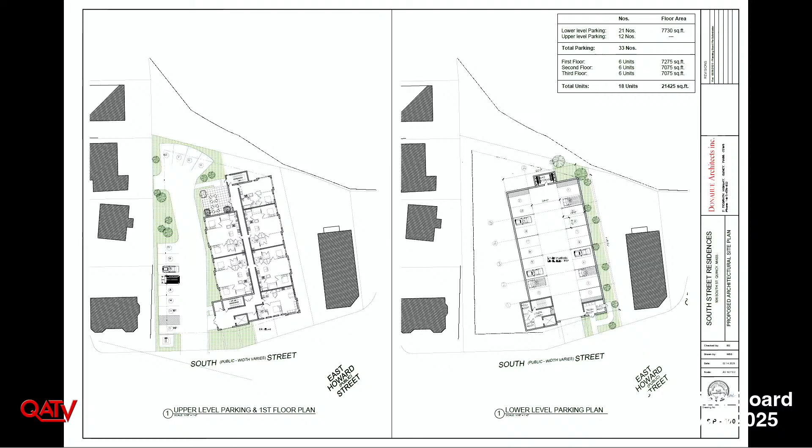So what that does is it also opens up the building to a little bit more outdoor space for the residents, and it creates more outdoor space for the enjoyment of the people that live there. Also, on the left side along the property line, you can see that we've removed the parallel spaces and greened that up tremendously. We've also moved the transformer from the front of the building by the drive over to the island by that left side parking. So the green space, I'll bring up the landscape plan in a second, but that shows that we've also gone from 35 spaces to 33, but we think that that's reasonable in light of the fact that we've reduced the number of units. There are still 21 spaces in the parking garage below.

I'd also like to address your concern, Madam Chair, about the size of, this may be an incidental issue, but you had commented about the trash room being small. So we doubled the size of that for the bins, and that's gone from 60 square feet to 110 square feet. So we did that without losing space. It was really an easy manipulation.

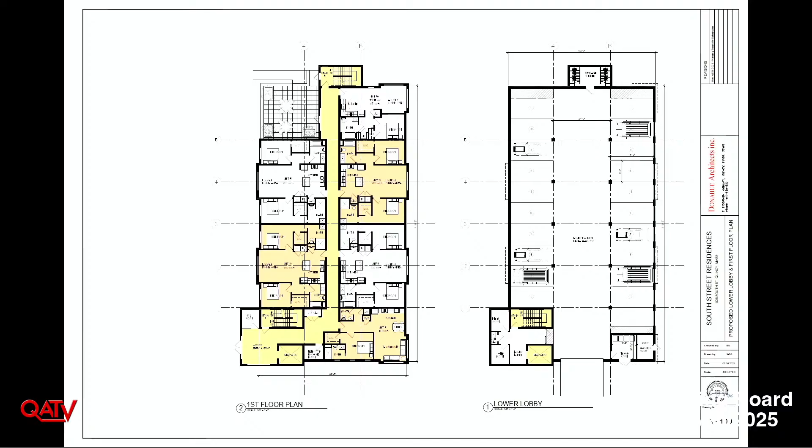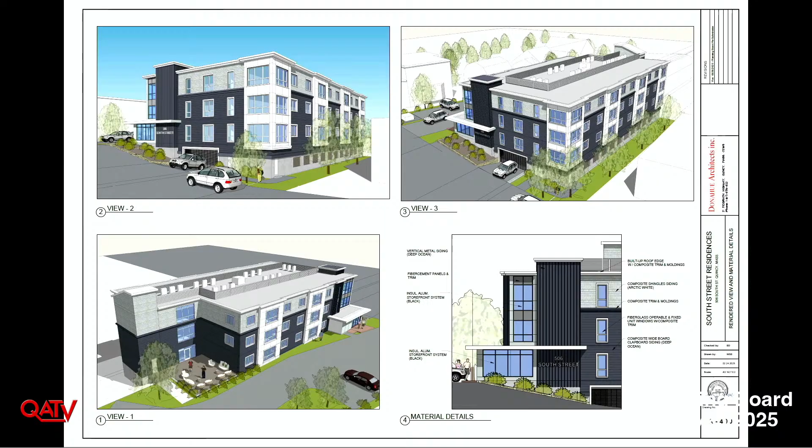I think that's it in terms of the architectural changes. Just want to highlight this briefly. Madam Chair, you had raised a concern about this, and it was hard to understand how much space that was. That's actually 3 feet in width, so it's not right up against the property line, and there will be a fence installed as well. We can certainly discuss the fencing with the neighbor, whether the fence should be brought in onto our site or onto the neighbor's property to provide them with additional green space along their lot.

And we talked about concerns raised about the transformer that was kind of buried in this location in the front of the building. After talking with National Grid, they changed their mind, that wasn't a good space for it. So we relocated it to the corner of the parking lot, and we directed our landscape architect to really green up around that transformer so that it will be shaded by the greenery and not be sticking out as an eyesore.

That opens up the front of the building now to really be a lot more attractive, as it was before. And this exterior patio space, I think, is really responsive to Mr. Foley's concerns about having some exterior space that these folks can enjoy. As you can see, this is a significant amount of lawn in the back that's going to provide for trash receptacles, so that folks can walk out into this area and utilize this lawn space for their dogs, for their pets.

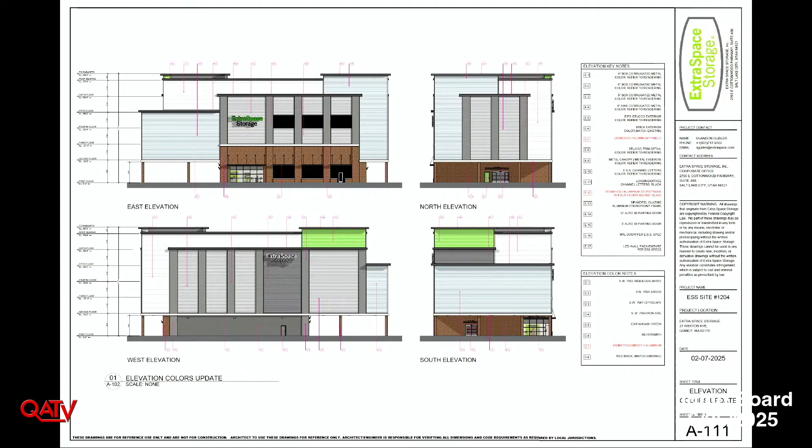So these elevations provide the board with a better visual image of some of the changes that have been made to the plans, adding some of the green amenities from the Extra Space coloring, and also these windows that were added. This entire facade here was essentially all just blank space, and by adding those windows, it gives it a little bit more residential feel in consideration of the neighborhood. Again, some of the additional window space and green was added to the building.

So that's really the only change that we made. I think overall the response was very good that we received from the board and from the community. Mr. Dryden worked very hard to respond to all of the peer review comments, all of the city's department comments, had meetings with Chen Sang also about some questions that Michael had about some of the foundationary items, and was able to reach agreement with Chen on those.

So that's essentially our presentation for tonight on any revisions. If there's any questions, we're certainly here to respond. Does anyone have any questions?

Madam Chair, just asking, so the developers of this project, are they a national chain, a local chain? David, do you self-perform?

So Extra Space Storage is the owner of the property. SDG Development, which I'm a principal of, is the development manager and general contractor. So we'll be building the facility for Extra Space. We're based out of Massachusetts.

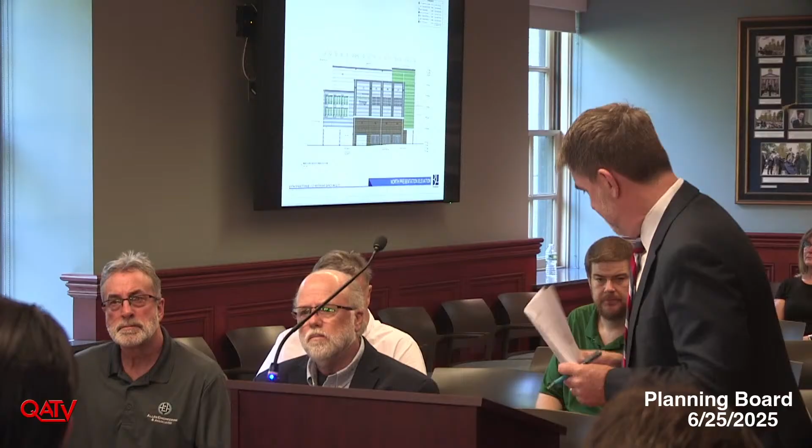All right, so is everybody... yes. Is there any drawing that would show a landscape plan and all that? Like she said, the woman mentioned it's a tree desert over there, so is there any?

We submitted landscape plans with a site plan. There's plantings proposed along the Weston Avenue frontage, as well as tree plantings between the proposed site and the daycare facility to the south.

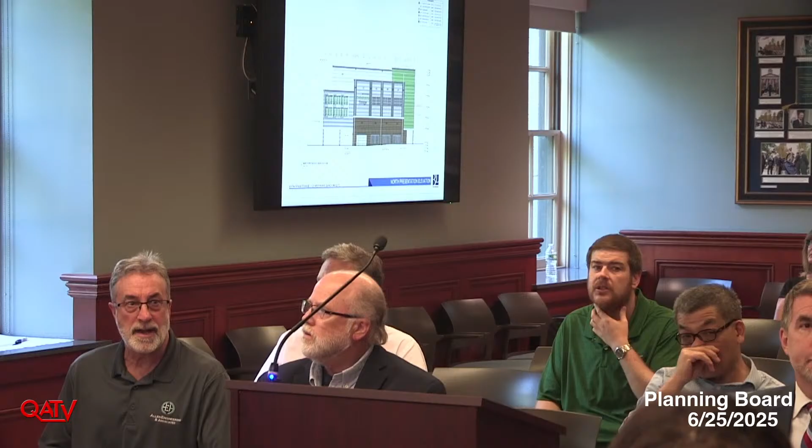Thank you. Great, any other questions? Good, okay. So is there a motion to close? So moved. Okay, is there a second? Second. All right, so that was member Liuzzo and Kelly. All those in favor? Aye. And does the department have a recommendation? Yes. Okay.

Through you, Madam Chair, to the board, after consideration of the site plan, accompanying documents, and the comments received from city staff and the peer review consultant, the department recommends the board approve special permit Title 17, Sections 3.1.3, major non-residential use, and 5.1.17, parking waivers, subject to the below listed special and general conditions.

Number 1, the applicant shall obtain all applicable findings, variances, and special permits if needed from the City of Quincy Zoning Board of Appeal. Number 2, the applicant shall submit a construction management plan to be filed and approved prior to the issuance of a building permit.

This shall include the locations of stockpile and/or staging areas for construction equipment and materials. The applicant shall also address construction period traffic impacts by providing a detailed sequence of construction and addressing any space constraints, detailing how they'll be addressed as construction progresses.

3, the applicant shall reconstruct the sidewalk along the entire property frontage of Weston Ave with cement concrete broom finished with border and tool joints, and reset or replace granite curbing as specified by the Department of Public Works.

4, Weston Avenue was repaved in 2024. The applicant must obtain approval from the Commissioner of Public Works to perform work in Weston Ave before 2029. The applicant shall be responsible for restoring the roadway curbing and sidewalk to finished condition once construction activities have concluded.

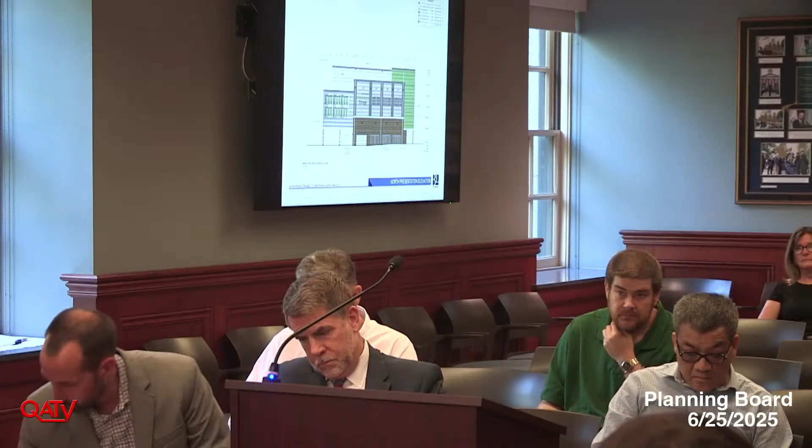Okay, and we did receive additional comment from Ross Nanopoulos. It's on several matters. I'll read the introduction and then read into the record his comments on these specific projects.

To the planning board: I moved to Wollaston six years ago with the promise of the Wollaston Urban Redevelopment Plan, and while I have seen businesses come and go, empty lots and storefronts still sit unused and undeveloped. The area around the Wollaston T-stop is where development must happen. I encourage residents to abandon the scarcity mindset that has engulfed past meetings and embrace one of abundance. It is inevitable that cities will grow, otherwise they stagnate. Instead of aiming for less or shorter buildings, Wollaston should reap the benefits through affordable housing and additional growth that benefits local businesses. Additionally, the planning board must work with the Affordable Housing Trust Committee to align incentives for developers to actually build affordable housing instead of simply paying a fee, as was mentioned as the preferred outcome of the Affordable Housing Trust Committee in past meetings.

Regarding my comments on specific properties: as to 18, 24, and 28 Old Colony Avenue, I am disappointed at the reduction of units from 94 to 62, a loss of 32 units, and the removal of affordable housing. Affordable housing should not be sacrificed to make a building slightly smaller. This area already has taller buildings, and we must embrace development near the Wollaston T-stop.

And as to 38 Old Colony Ave, I am disappointed at the reduction of units from 27 to 19, a loss of 8 units, and the removal of affordable housing. Affordable housing should not be sacrificed to make a building slightly smaller. This area has taller buildings and we must embrace development near the Wollaston T-stop.

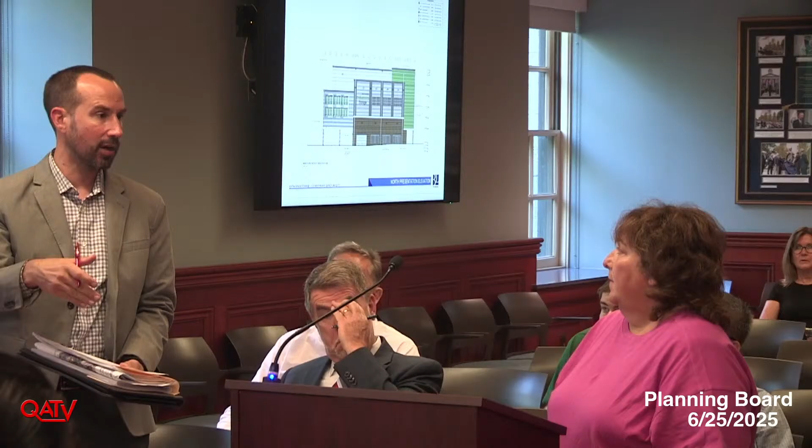Is that an option? I can maybe add to that. So the intersection at Beale Street and Old Colony used to be signalized for traffic, and now it has priority pedestrian crossings. So there's that signalized crossing for the pedestrians. The city already took steps to heighten that crossing, knowing that they want to drive traffic. So the city actually created more of a traffic jam, and putting up more buildings with more vehicles is gonna cause a bigger traffic jam.

I'm asking, can we put a fence up and force the pedestrians to go left or right where the lights are already existing, where when people are coming off of Old Colony Ave, they have the option to take a left or right. Because once the pedestrian lights, the blinking lights, once they're pushed, it's complete gridlock. Obviously the pedestrian has the right of way, but it's gridlock coming off of Old Colony Ave. It is gridlock going down Beale Street, it is gridlock coming up Beale Street.

Hancock Street is gridlocked, Newport Ave is gridlocked. People on the other side of Beale Street where the Wollaston train station is, you get like 4 cars through. So there has to be some kind of barrier to stop the pedestrians from crossing wherever they want, like a fence, so they just can't walk across to the train station. We're all talking about foot traffic, because that's what people want, I get it, but can we make the foot traffic go in a certain pattern, like we do cars?

Is that doable? Can you put a fence up? I know it's a train station, but... We can't. And I doubt that the city can do it, but that's a city decision that has to be made by the city.

So did the city get money for that blinking light, or is that something that has to be there? If there wasn't a light, the pedestrians, if they were smart, would go to where there are lights and a crosswalk, I would imagine. Could we remove that blinking light for pedestrians and force them to go to where there's actually a stoplight and a walking signal? Is that an option for the city to do?

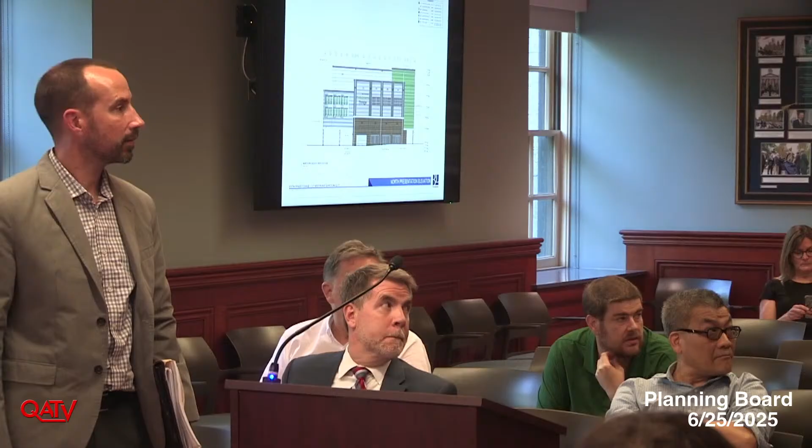And that's the highest rating it can go, so it can't go any higher, so it can't get any worse according to your scale, if I'm correct. Yeah, according to the scale, it can get worse though, the paper just says it can't. Yeah, and I think there was a marginal impact of a few seconds at that intersection. I think over the course of time, people find routes to go, right? There's just a natural pattern that happens.

Thank you. All right, anyone else wishing to speak on these applications? Okay, and so with that, motion to close the public hearing.

Okay, so we need to close each. The first will be 18, 24, and 28 Old Colony Ave. Is there a motion to close that? So moved. Okay, is there a second? Second. Okay, so all those in favor? Aye.

Should I close the next one too before? Okay, so we will then close 38 Old Colony Ave as well. Motion to close 38 Old Colony Ave. Is there a second? All those in favor? Aye.

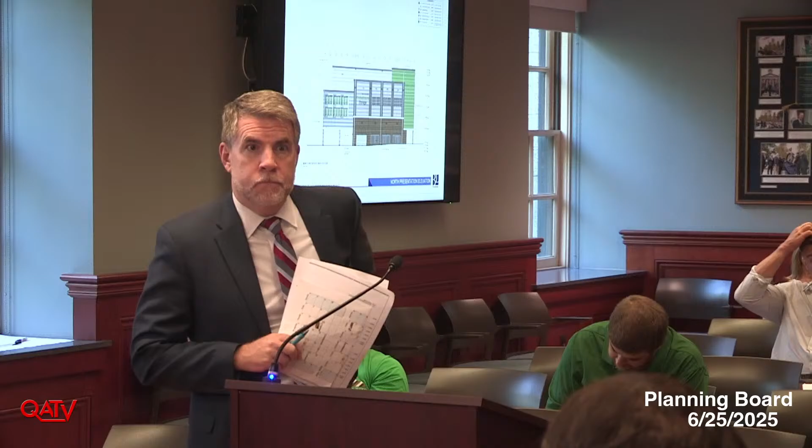Thank you. Does anybody have any questions? I'd like to make a couple comments. I think it's going to be a nice addition to the area. I liked the project built at the old China Star, and I think this is a very similar project that will add to the area. You also get the benefits of what they're doing on C Street. Absolutely, that's a great thing.

Mr. Lee, I would hope that when you decide to build with local contractors, you keep in mind the men and women of the city of Quincy. They live here and they'd like to work on projects in the city, so keep that in mind when choosing a contractor. Thank you. Good luck. I know our friend Jimmy Dunn will be part of the job right off the bat. He's a local guy, as local as they come.

Does anybody else have any comments? Mr. Dunn? Thank you. All right, so it is a public hearing, so if anybody would like to speak on this, it's 211 C Street, Planning Board Case Number 2025-10. There are sign-in sheets along the window.

Okay, all right, seeing none, is there a motion to close the public hearing? Okay, all those in favor? Aye. Aye.

And I would just echo Mr. Kelly's comments. I think this came to us, like so many projects rarely do, very well thought out, taking into consideration a lot of the comments from the neighbors. I think that's a testament to you and the thoughtfulness put into the design, and I think it will be great. Thank you.

Does the department have a recommendation? Yes, we do. Through you, Madam Chair, to the board: after consideration of the site plan, accompanying documents, and comments received from city staff and the peer review consultant, the department recommends the board approve site plan review under zoning ordinance Title 17, Section 9.5.1, and special permit under Section 5.1.17 parking waivers, subject to the below listed special and general conditions. One, the applicant shall obtain all applicable findings, variances, and special permits if needed from the City of Quincy Zoning Board of Appeal. Two, the applicant shall comply with the City of Quincy inclusionary zoning ordinance, Section 7, and shall submit an IZO application to the Affordable Housing Trust Fund Committee prior to the issuance of a building permit.

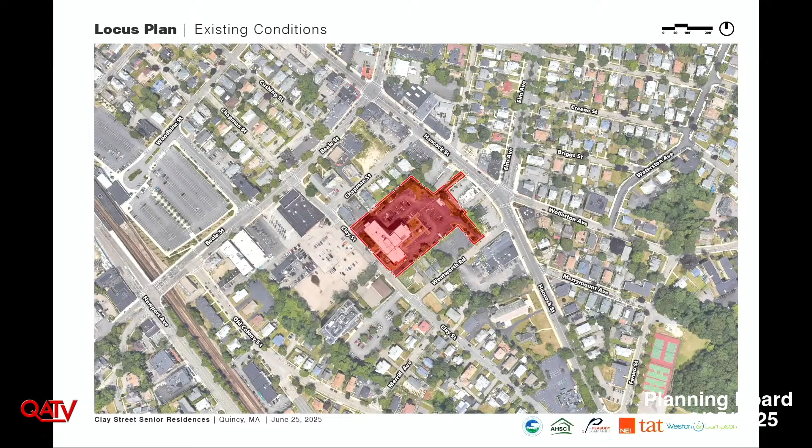We'll start with the first slide. I want to get everybody oriented to the site, whether you're familiar with it or not. This is oriented to the north. You have Clay Street essentially to the south of the existing Tobin Tower, Wentworth on the eastern side of our site, and Hancock Street to the north of that. As mentioned, we're in the Wollaston neighborhood.

Here's a snapshot of what the existing site looks like now. I don't know how many of you were on the board back in 2016, but if anyone was, you're probably familiar with this project that came through for redevelopment. There was no curb cut at the time to Wentworth Road, so the project came through to do a full redevelopment of the back area behind the building, and what you see here today is the final product that was constructed in 2017.

At that time, the site was fully repaved, stormwater was updated to comply with Mass Stormwater Guidelines in full compliance, and utilities were brought in for lighting, making sure the existing building was in compliance. When we got on board, we looked at the record plans of what was constructed in 2017 and understood we needed to find out what happened then and what's going on today, especially with stormwater. We heard right out of the gate that there were concerns in this neighborhood with stormwater, not only affecting our site on Clay Street but the overall area.

So we wanted to find out soon what's going on with the potential for future flooding and be sensitive to that when redesigning. We always look at a site to understand the constraints right out of the gate, from utilities, stormwater, abutters, and buffer zones, before we start laying things out.

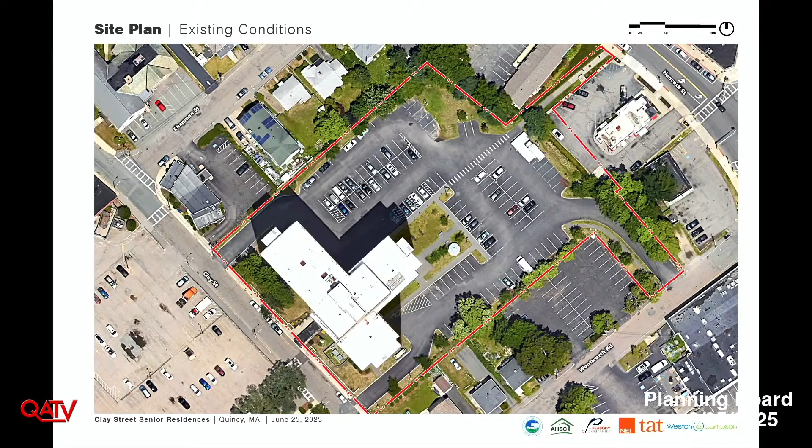So when we heard that, we said, what if we change the circulation on the site? There are 2 curb cuts off of Clay Street now, both full access in and out, and then there's a curb cut off of Wentworth with 2-way access.

What we're going to do is, that one in the lower corner, we'll essentially abandon the cut-through ability of that curb cut and just have it be for 2 parking spaces, for employees of Tobin Tower, removing the ability to drive through the site or out through that Clay Street access. The existing one to the west, we'll change to one-way only, so it's ingress only into the site, not 2-way. That's going to accomplish a lot for the congestion on Clay Street.

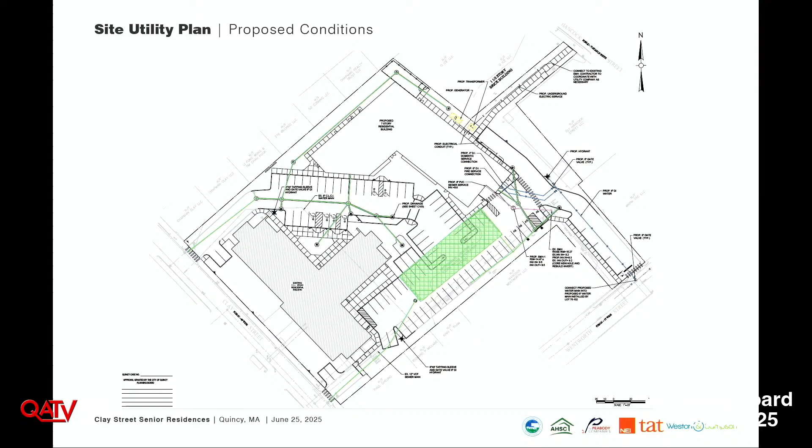Thank you, Jesse. Good evening, everyone. Jonathan Law from Weston & Sampson, I'm part of the design group, and I will talk a little bit about the site amenities that we've developed as part of this proposal.

When we approached this problem, the solution we came up with was how can we connect these two buildings so they feel like they talk to each other and are part of the same site. We've done that by using materiality on both sites that match and talk to each other, emphasizing entrances and exit points from the buildings and connections by using specialty pavers, which may in some instances be permeable - again, thinking about low impact development ways of dealing with stormwater.

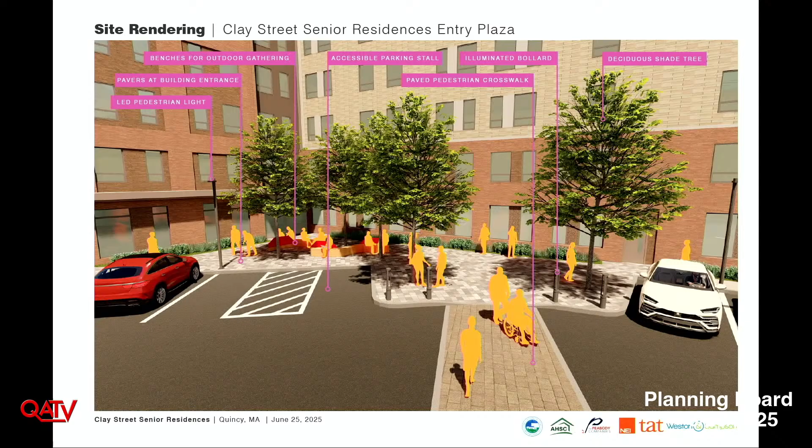This is another view swinging around, looking at the main entrance to the new development, the new building. As I mentioned, we're trying to incorporate as many shade trees as we can and think about how people can gather and sit outside in these spaces.

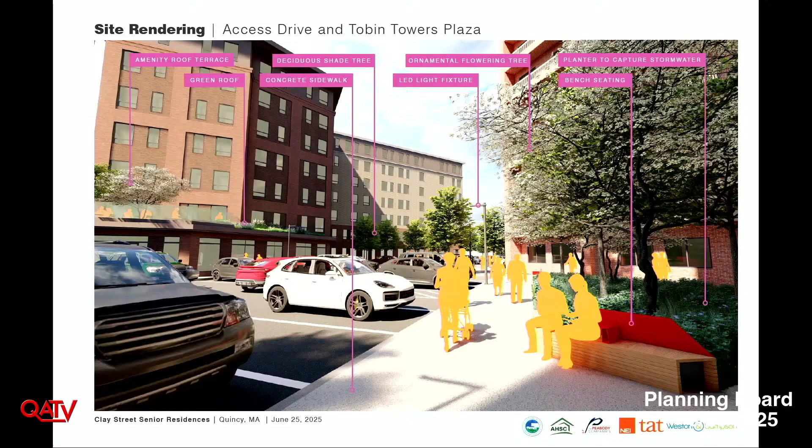Some of the materials, like the paving, we'll think about the solar reflectance index, so when the sun hits it, instead of heat radiating off it, it helps to reduce the effects of heat on the site.

This is a new planted green space that we're including by Tobin Towers, with more seating scattered amongst the development so people can take a respite whenever they like. You can see again the green roof and the amenity roof terrace.

This is the new space in front of Tobin Towers, as I talked about previously. Similar benches and ground plane materials match across both buildings, bringing some continuity to the design and the site in general.

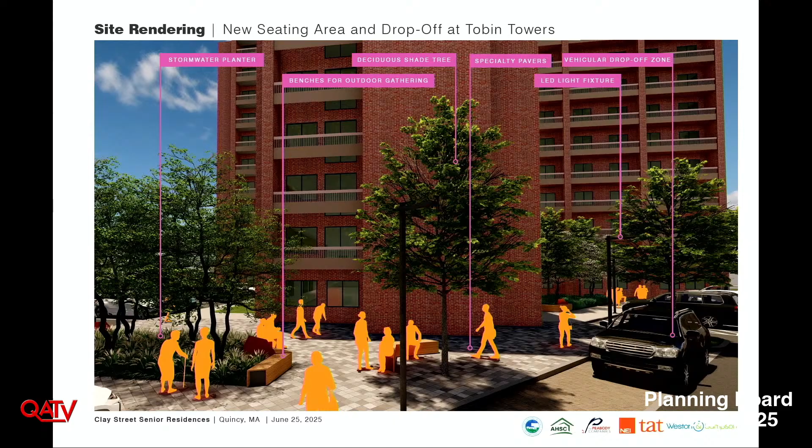I'll talk about the architecture. Thank you.

Thank you, Jonathan. My name is Jay Szymanski, I'm a principal with TAT. We're the architects for the project.

As has been mentioned, we're proposing a 7-story building. It includes 94 one-bedroom units, all affordable, set aside for seniors. The entire building will be visitable by people with mobility impairments, and in addition, 10% of the units will be set aside as fully accessible units. The building will be designed for Passive House certification, along with Energy Star compliance and Enterprise Green Communities. We will build the building to be solar ready, meaning we'll put in the infrastructure to be able to put solar panels on the roof in the future.

What you're looking at here is the ground floor plan. It's essentially an L-shaped building. The top portion in gray is parking, 22 spaces inside the building. We also have back of house spaces: the electric room in the top corner, water service room, maintenance room, trash and recycling. In the lower wing, shown in salmon, are the resident services: a resident lobby, mail and package room, management offices, resident services offices, a community room on the bottom left, a wellness office, and some restrooms.

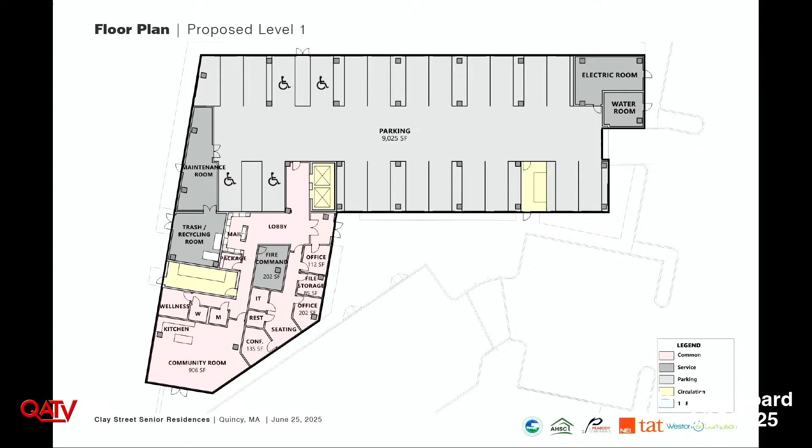This is levels 3 through 7. They're all identical, 16 units on each floor. We also have common laundry on each floor, access to a trash and recycling chute that leads down to the trash room on the ground floor, and of course internal vertical circulation with 2 elevators and 2 stair towers.

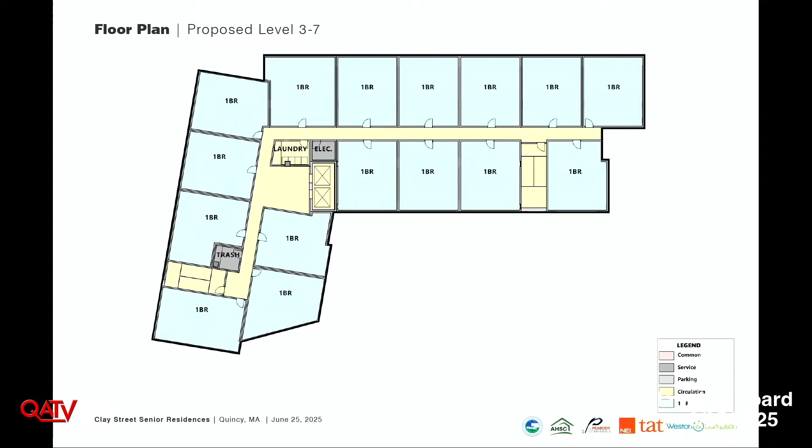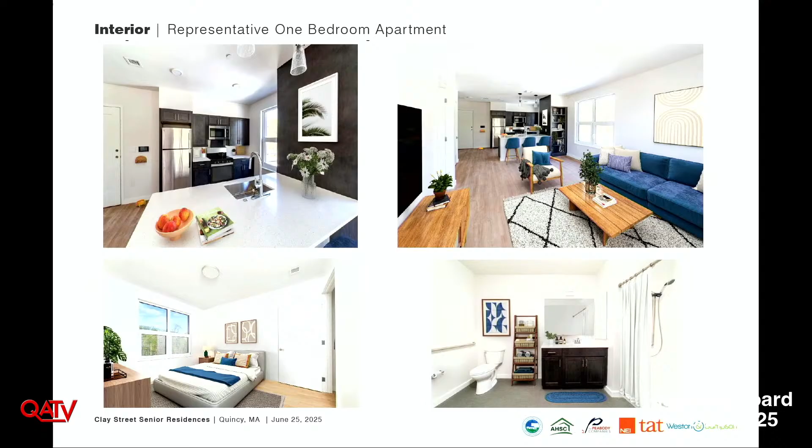So this is just an example of a one-bedroom unit that Peabody Properties has developed in the past. Typically, they're open kitchens, open to the living room and dining areas. They use high-quality, durable materials, solid surface countertops, LVT flooring, LED light fixtures. So again, this just gives you an example of what we propose to build here.

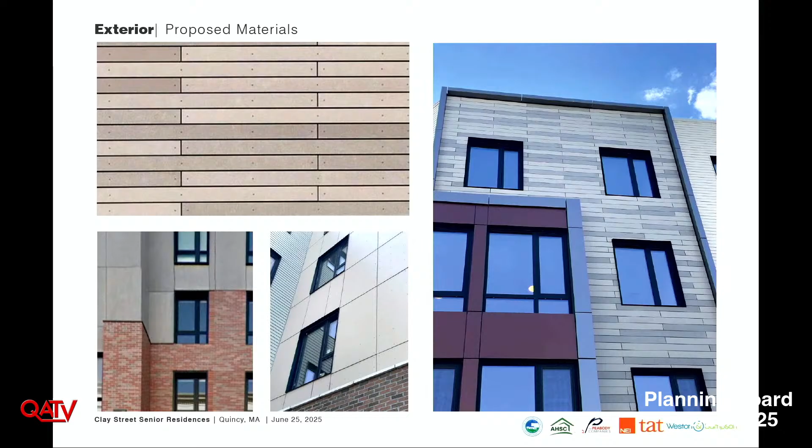And with that, I'll hand it off to Doug to talk a little bit about traffic.

Greetings, I'm Doug Osler, Weston & Sampson, traffic engineer who performed the transportation impact assessment for the project. I did have some coordination with, forgive me if I say it wrong, I believe it was Allison Luff, who's the traffic engineer at the city of Quincy, so she's familiar with what was proposed and provided in the report submitted as part of the application. In brief, we don't expect any major transportation impacts specific to our site because we don't expect to be generating very many trips. We're very far from any threshold requirements that MEPA provides for state traffic studies, but of course we're providing this in order to document what we expect for the location.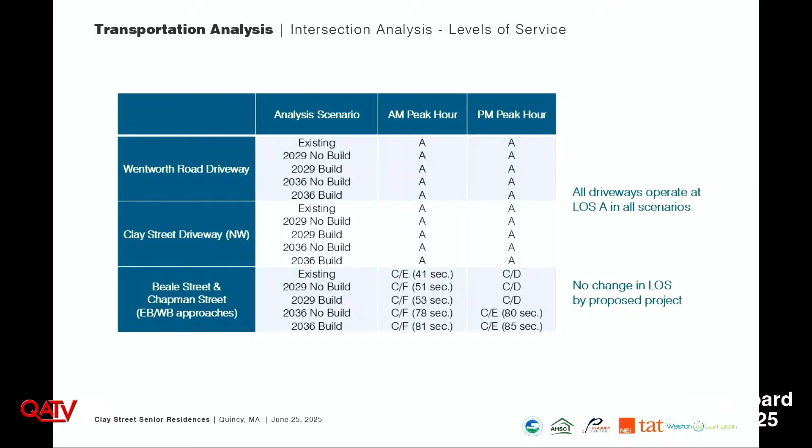There are additional things, but I'm not going to go through all the minuscule details. The report did get to Allison, and she's reviewing that, of course. I'm happy to answer any questions.

So that's the applicant's presentation tonight. I don't think I mentioned, but obviously the relief that's being requested is a site plan review and also a special permit parking waiver, similar to the other proposals you've heard tonight. We know that peer review hasn't had an opportunity to fully review this, as well as the departments, and we'll continue to work with them to respond to all their concerns, and we anticipate that this matter will be continued until August.

Okay, let me see if anybody has questions. Member Shaughnessy: So looking at this rendering, my first thought is it kind of looks like the prison that's over there inside Boston.

I don't see any exterior areas for any of the residents to go outside, other than that little small area on the second floor with a small green space. So if I was in this tower and my brother was in the other tower, he'd be waving at me out on his balcony, and I'd be behind my window going 'how's it going?' So I'm just wondering, why wouldn't you consider putting balconies or something outside, so it would match the other one?

Well, is that what's on the other ones? I was trying to see it, Clay. Yeah, there's - it looks like balconies on the other building. Yeah, there's balconies on some of them. Isn't it? The pictures show on Tobin Towers, it looks like balconies.

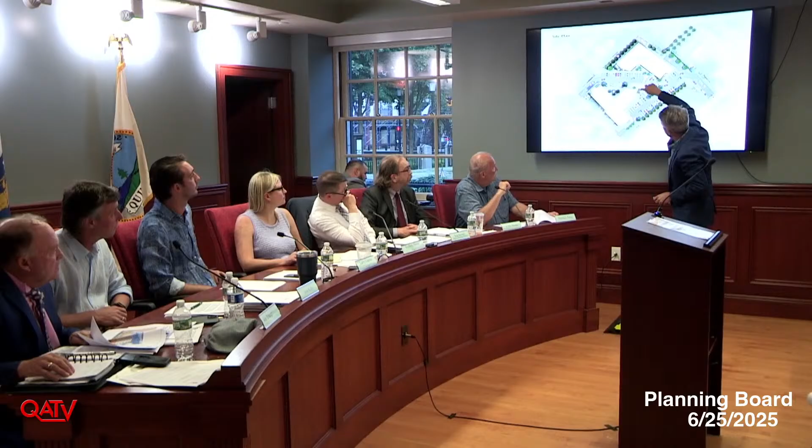Jay: Am I allowed to come up to this? So we're creating, in these spaces here, exterior spaces that don't exist today. We're also creating new seating spaces here, and then also in this space here. For the size of this site, we're restricted by needing emergency vehicle access through the site, so that's why this road comes through here. In an ideal world, this would be a green space, a big lawn area, but we can't do that because we need fire access through the site.

We need to be able to get this building on three sides, so that's why the road comes through.

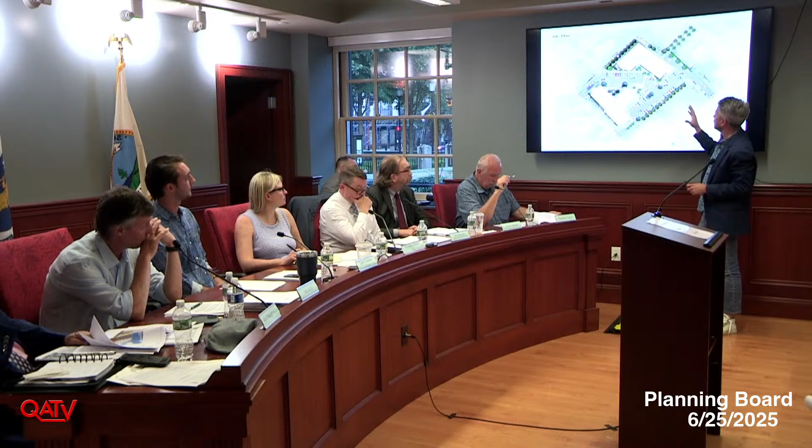With what we're dealing with, the space left over, we've created some meaningful places for people to sit, and again, they're sitting under natural shade. We're talking about potentially putting a shade structure in this space here. So in terms of outdoor gathering spaces, we're restricted with the space we have, but I think we've maximized that within this footprint of the site.

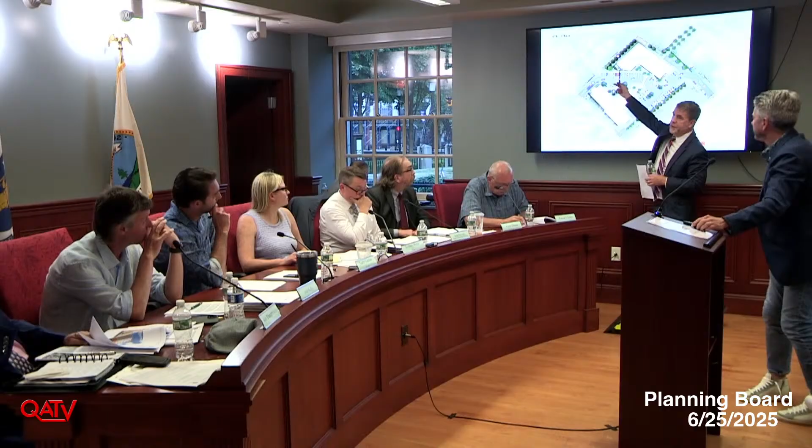There's also the structured patio space up here on the second level that will be utilized, and also community room space within the building. So if family does come over and they want to get together, they can utilize space within the inside of the building as well, but also this structured space and the space on the ground.

I'll just add that all sidewalks and paved areas are ADA accessible. So what I mean by that is everything is graded at less than 5%. There's no ramps, there's no handrails, there's no stairs to get into the new building, so it's fully accessible for everybody.

Right now, as everybody knows, it's just a parking lot back there with really no sidewalk connections. As I mentioned earlier, we've improved the connections not only within the site, but to the exterior, Hancock, Wentworth, and Clay, so there's plenty of space for people to walk and loop in this site without leaving.

Please don't take my comments as being offensive. I know you haven't, but I love the idea that you're gonna get some affordable housing here. I mean, that's awesome, I think it's just great. It's just that I think, okay, that's nice, and elderly, I happen to be one of those at this point. If we're going at 60 and above? Sixty-two. Yeah, so if I get stuck over there, I'd like a little bit of green space, but I like the fact that you're coming in with affordable housing. I applaud your efforts, I think it's wonderful.

I'd just like to see, maybe you can look at making that a green roof, again for water runoff, or maybe another area that could be an outside common area, not the whole roof, for like a common area to go outside. The views would be beautiful up there, you know what I mean? I know you don't wanna spend a lot of money on it because it's affordable housing, I get it, but we gotta kinda make it comfortable, right? So, that's my comment, that's all, thank you.

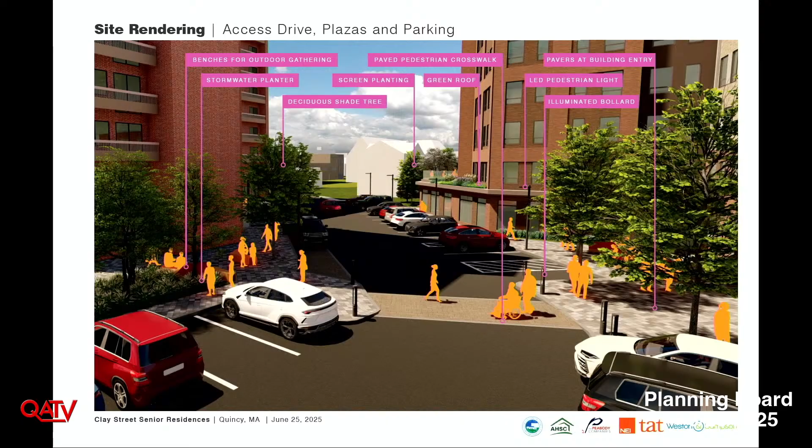And then with the heat pumps and the cooling, are you going to use individual units or have a cooling tower up top? We won't have a cooling tower. It will either be a VRF system, which combines a bunch of units into one big condensing unit on the roof, or we'll have one-to-one. We haven't decided that yet.

Okay, thank you, Madam Chair. Okay, that's it. Member Louisa, any questions? Couple of questions, Madam Chair.

So garage parking, 22 spaces in the garage, so 90 spaces outside, is that correct? Okay, so that's gonna be shared parking between the two buildings. Total is 112. Of the 112, garage parking will be for the new proposed building, the surface will be split between both.

I'm assuming that current folks who currently park in the parking lot will be given favorable permits or treatment with getting that? Yeah, parking was a main issue of concern as we discussed this with the Housing Authority as the proposal was being designed. What the Housing Authority determined is that because their main office headquarters are located there, most of the parking spaces in the lot right now are utilized by employees. I think there's like 39 spaces utilized, and most spaces are essentially vacant at night because there's very few people within the Housing Authority that own cars.

But yes, those folks will continue to have an opportunity to park, and we'll provide parking for the new residents as well. The other thing that Peabody had the opportunity to do is analyze all of the affordable housing projects they've done throughout the Commonwealth, and analyze the demand, and they determined that the parking being provided here will more than satisfy the demand based on their other sites. We can certainly provide that information to this body.

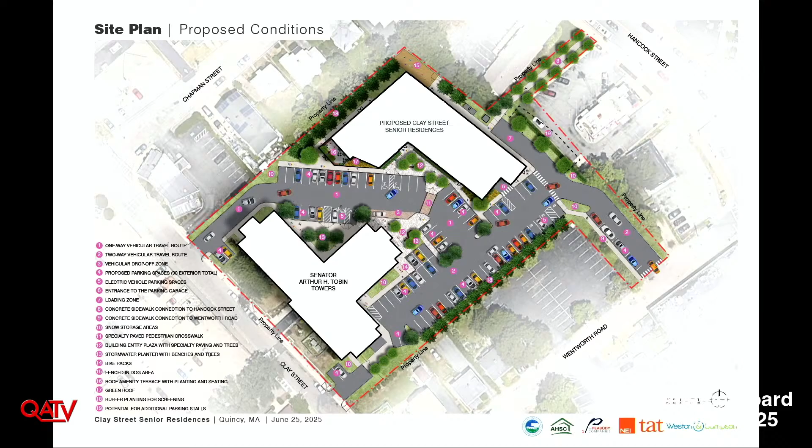I know Member Leozo asked this, I may have just not understood. So the shared amenities component, can residents of Tobin Towers use the shared amenities that are going to be created in that new building? No, not in the building.

Not inside the building. May I ask a follow-up to that? Why, I guess? So, couple things. One is there will be opportunities for a program and to invite people in. We will try to keep safety of both buildings so that people don't have open access between the two. The Tobin Towers would not look forward to having 96 people have, say, the master key to get into the front door. But there will be programming done between the two properties.

And with regards to other security, the fitness room is not really sized for a 300-person development. So we try to be accommodating with shared activities and other things, but we've also got to keep in mind the occupancy requirements.

Okay, just so I understand, you might have said this 100 times already, so Peabody's managing the northern, but not the Tobin, or is Housing managing both? The Authority will continue to manage its building and operate it. There'll be some cooperation between us. Obviously, we're sharing a site. But that's more to do with just the physical maintenance of the outside buildings.

And there may be opportunities that we would use the Housing Authority's current maintenance and other people as a vendor that we would hire in lieu of going to a third party. Okay, thank you, that's helpful. I see now, okay, so that's fine.

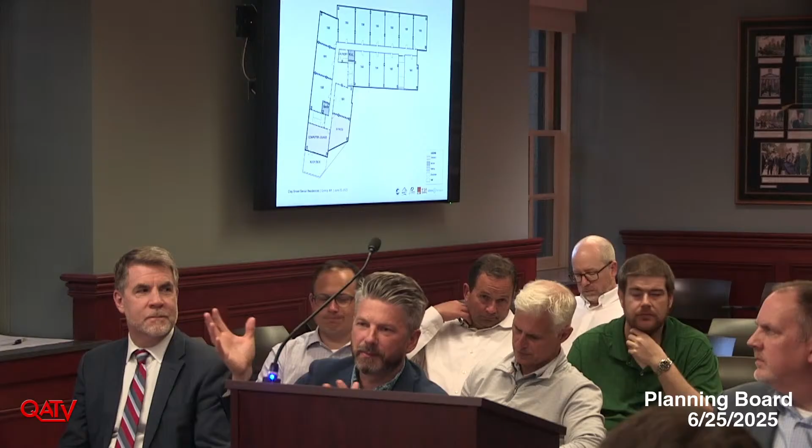I think, members, you guys just have one more question, and I should have prefaced my previous comments. I think this is a great project, it's necessary, it's needed. I think they're very dignified living spaces.

With PBD in control, and I believe James mentioned this at the beginning, because the Housing Authority is not involved, does PBD then have control over who gets to be the tenant, or who can occupy the units, like Quincy residents? I'll come up because it's a little more complicated.

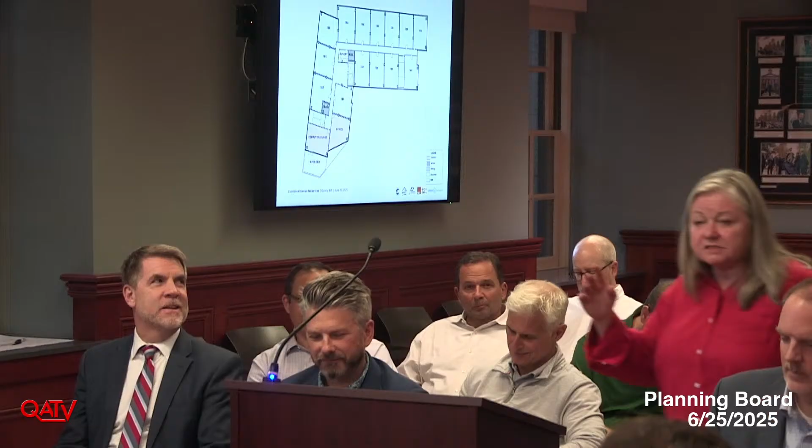So we are still governed by affirmative fair housing laws, and so what we will ask and advocate for with the state regulating this is that the maximum amount of local preference be approved for this project. It will not be an issue because there's demand in Quincy. In my experience, I've never had that situation. Just like we did at the Moorings, which was 20 years ago, and I'm sad but proud to say I did that project, and I could live here if I chose to.

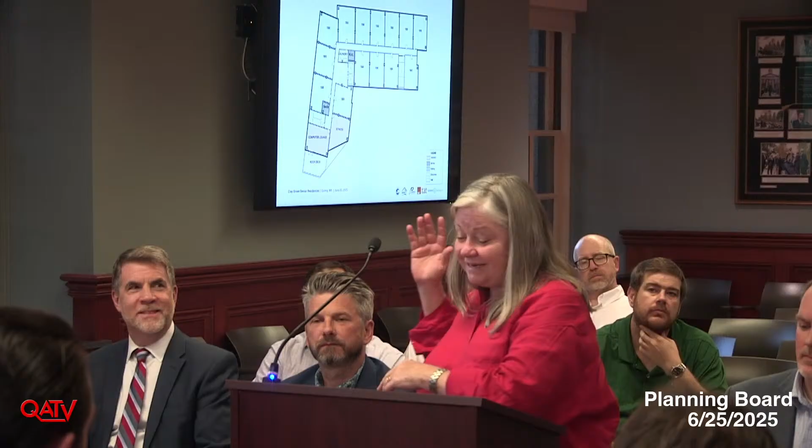We will ask for 70% local preference. That means on initial lease-up, there will be a local preference overlay in our tenant selection plan. When we do a lottery - this is actually going to be two projects built in one building, so we'll have two lotteries - they will have that local preference, draw the numbers within the different income set-asides, and that's how you get your initial wait list and occupancy done to ensure residents of Quincy and people who work in Quincy are included in the state's definition of local preference.

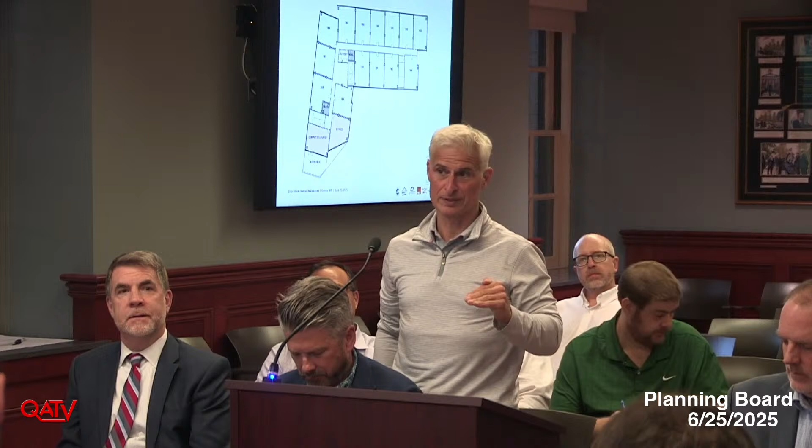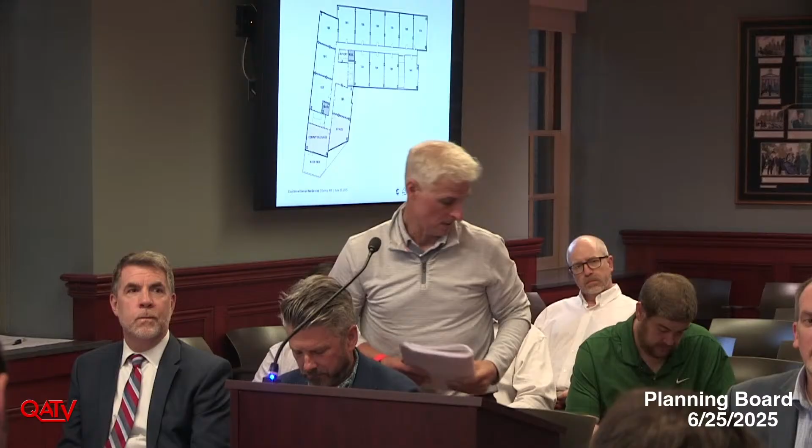Can you talk a little about the income levels as well? Sure, now I'm going to need one of my other projects because I need a cheat sheet. I'm going to let Dana give you the exacts, but in this project there's 40 units at 30% AMI, 51 units at 60% AMI, and 3 units at 80% AMI. For the uneducated like me, tell me what AMI means. Oh, area median income - I could talk about cranes instead. Yes, I'm going to have to check my handy dandy notes here.

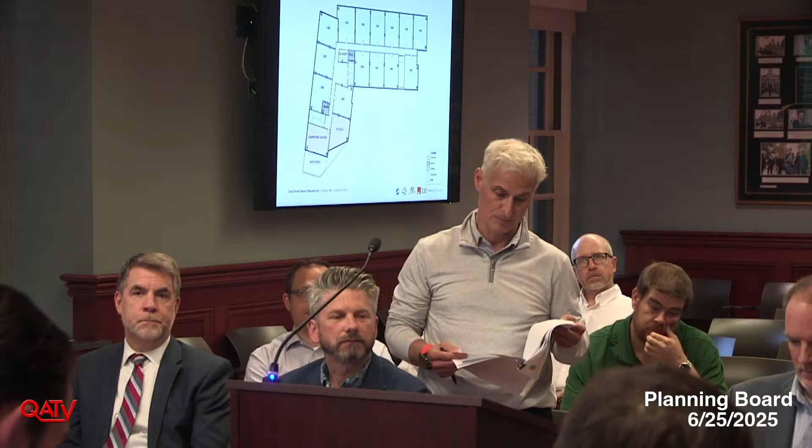A 30% AMI, one-person household makes about $34,740. That rent, established through HUD today, would be subsidized at $930. A 60% AMI rent would be $1,861, and that 60% single-person household makes $69,480. An 80% single-person household makes $92,640, and that rent is $2,482.

They get the top floor. No - they get the one with the balcony.

I have a question for Ms. Collins, please. So you guys are the Peabody's, not Peabody Construction but Peabody Properties. Is NEI a Peabody company? No, it's not, no relation? No.

So are they a Massachusetts construction company? We have NEI here, they can answer questions and talk a little about that. I mean, is this going to be a steel structure? What's the construction on this? Is it steel on the bottom and wood on top? It'll be two floors of steel and then wood above that - podium construction, right, podium construction, okay.

And you've done these before, obviously? Quite a few, quite a few. Thank you, thank you.

Sorry, I've been up since 3 this morning, but I forgot to ask earlier - electric car charging stations, did you put them in there? Yes. How many? 4 day one, 7.

So could you guys just come up, yeah, thank you, just because people are watching at home and I'll show you where those are. So we have 4 day one - oh, I went the other way, sorry - and we have 7 accommodating, where they would put in the dry conduit and make them basically ready.

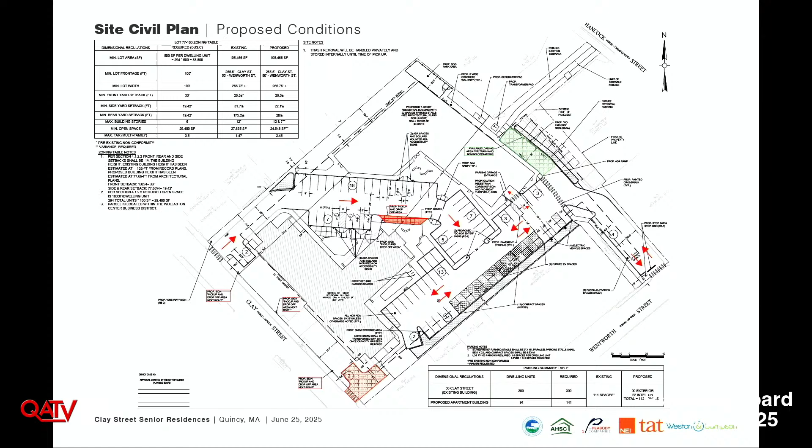So 4 right here, they'll go in, get ready, and then you have an additional 7 that they can accommodate. That's at a minimum you need for the amount of parking stalls. So that's for the funding source. They require in the certification for Passive House, you actually have to accommodate 10% of level 2 chargers.

Yes. Thank you. Okay, and I do have one more question. James Morales, Quincy Housing Authority. Currently, we're working with the state right now on a grant to put in 50 charging stations throughout Quincy.

So Quincy Housing Authority, there was some testimony that parking on site is for our 20 employees. Is there anywhere else in the city where that could be spread out? We're actually working on a plan to do just that. We purchase a shuttle, and we run it every day of the week, taking residents shopping, to all the supermarkets and pharmacies, every day. There's also discussion about having the shuttle and off-site parking for employees. So that's something we're currently working on.

I also wanted to mention there's been discussion both with the church and with the MBTA to assist in offering additional spaces off-site, not only potentially for Housing Authority employees who utilize the site more often, but also to offset the demand that might exist. We think there's already been positive discussions with the church. The church has offered leasing of spaces, certainly during construction, because we anticipate some disruption to the lot, so we'll be able to supplement that parking through the church. But that might be longer term as well.